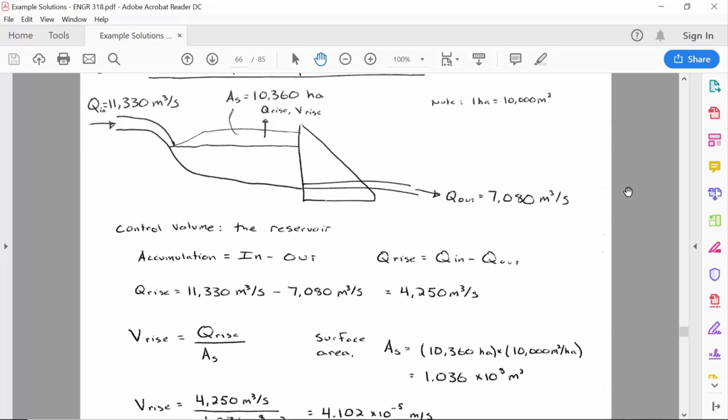So then the last step to find the velocity that the liquid level is rising, we have to take Q rise divided by the area. This is V equals Q divided by A, so this is just application of the continuity equation. We have it in terms of meters per second, but if we want to know the rate it's rising in meters per hour, because maybe that's a little bit easier to comprehend -- like I wouldn't know what 4.1 times 10 to the negative 5th meters per second looks like, but I can wrap my head around 0.148 meters per hour.

So that tells you, if your house is however many meters above the water surface right now, it tells you how long you've got to evacuate, if the water level's rising.

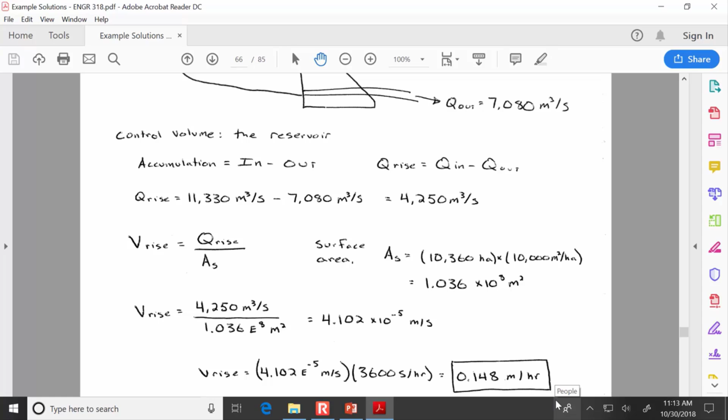I guess I've got that show Ozark on my mind. They're always talking about how people were flooded out. Anybody watch that? The whole point of the show is fluid mechanics. Some guy's deeply offended by the electric company and how they flooded his ancestors' land. So how could the main plot be about anything else? That's also the main plot of First Man, which I watched over the weekend - fluid mechanics, the air over the wings, that sort of stuff. So it all comes back to fluids. Any questions before we move on?

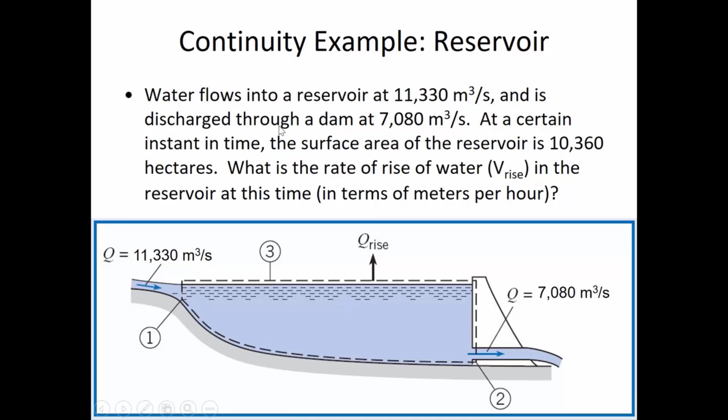Let's revisit the orifice equation, because what we looked at before was just steady state. Remember, in the lab, we ensured the liquid level stayed the same by having a certain flow coming in, water coming out from the orifice, and also an overflow. That tube we raised and lowered controlled the liquid level and made sure there was always the same amount going in as going out - it didn't flood, no spillage over the top. But it's not always the case that you have steady conditions.

One important application of unsteady flow is a storm event. When it rains, there's a sudden rush of water coming off pavement and vegetated areas, all headed towards receiving bodies like creeks, streams and rivers. That's a really important unsteady flow condition.

Sometimes to mitigate flooding of rivers, they send water to stormwater ponds. There's a good example over by Target in Barbersville - as you go towards Target, it's on the left side, behind a big chain link fence because it's so deep they don't want anybody getting in there and splashing around when it's raining.

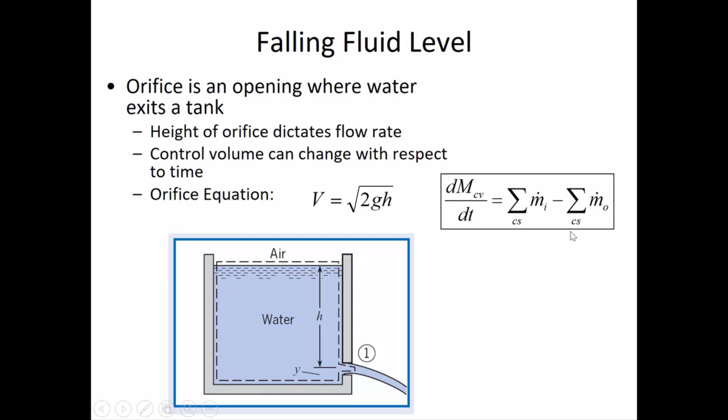So what we'll be doing is tracking the change of mass inside the control volume over time. First we look at the rate of flow out through the orifice, which is V1A1. There's a certain diameter opening - in the lab it was either 3 millimeters or 6 millimeters depending on which equipment you were using - and you can calculate the cross-sectional area from that diameter, so that's A1, the area of the opening. The velocity it comes out at we determine from square root of 2gh - that's the outflow component. Then the change of mass inside the control volume can be tracked as it decreases by looking at the cross-sectional area of the tank.

So this A sub t is a different area than the orifice area. The A sub t is talking about if we have a circular tank, what is the cross-sectional area of that? So A sub t is the top view area of the container. And then dH dt is how quickly the liquid level is falling over time.

Similar to what we just did in the previous example, but instead of the liquid level increasing, if we only have flow out, the liquid level will be decreasing.

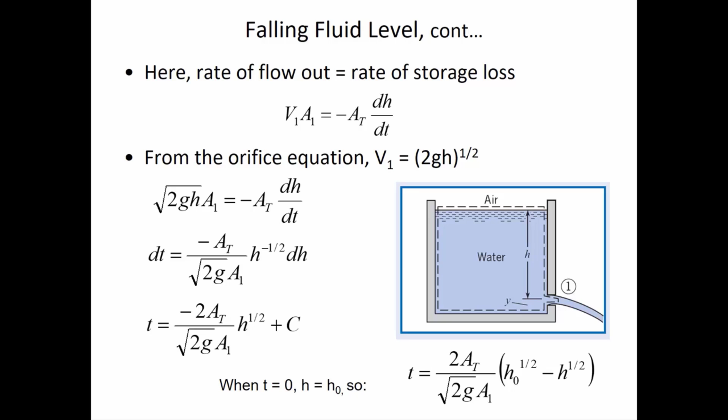On this upcoming homework, there's a problem that is almost identical to this. Do we have to derive the equation, or is it okay if we just use that one? You can use this directly. You don't need to derive it.

Okay, so let's try out this unsteady flow. The tank has a diameter of 500 millimeters, so that's going to give you the A sub t. The orifice opening is 15 centimeters, so that's going to give you the A1. The initial height of the water is 2.5 meters, and so that is from the center line of the orifice up to the water surface, 2.5 meters.

Okay, now you got to be careful because these are always trick questions. It's just like a basic intelligence test to make sure that you can dimension your drawing and put in the right values for H naught and H.

So in question A, it's asking how long will it take to fall 1.1 meters? So 1.1 is not H naught and it's not H. What you need to do is you have an initial height of 2.5 and it's going to fall 1.1. So what is the final height after it has fallen 1.1? That's what you need to put in here for H, is the final height, not the fall distance.

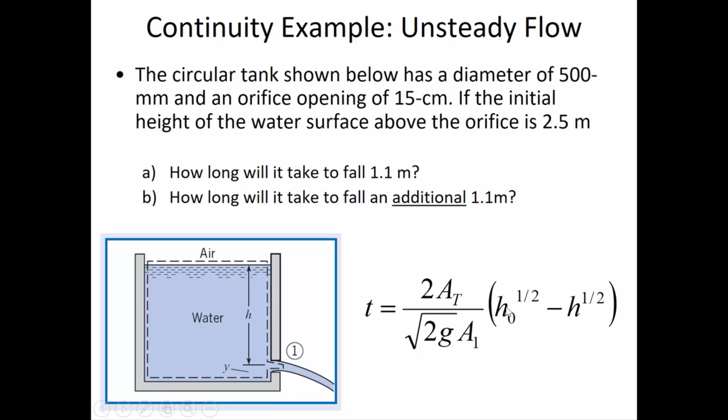All right, so I'm going to pause this for a moment so you can calculate the tank area, calculate the orifice area, and then in part A, how long for it to fall the first 1.1 meter, and then, just for kicks, let's in part B see how much does it take to fall another 1.1 meter. So you're going to have a different H naught and H than you had for the first question.

All right, so we calculate the two relevant areas, and I got a question about the wording of the orifice. It didn't necessarily say that it was a circular opening, so I changed that to make it more explicit that, yeah, it's a circular opening.

So we calculate the areas, and then the dimensioning and interpreting the heights. So that means if the initial height's 2.5 and it's falling 1.1, then the finishing height at time t should be 1.4. So we want to find out how long does it take to go from 2.5 down to 1.4.

Now, by the way, remember, this is all assuming no energy loss through the orifice. So if we wanted to actually observe this more accurately in the field, we need to apply a discharge coefficient. You've already learned about C sub D values, and so you could calibrate this orifice and find out what is the discharge coefficient, because it's not going to drain as fast as we think it is because of that whole discharge coefficient thing.

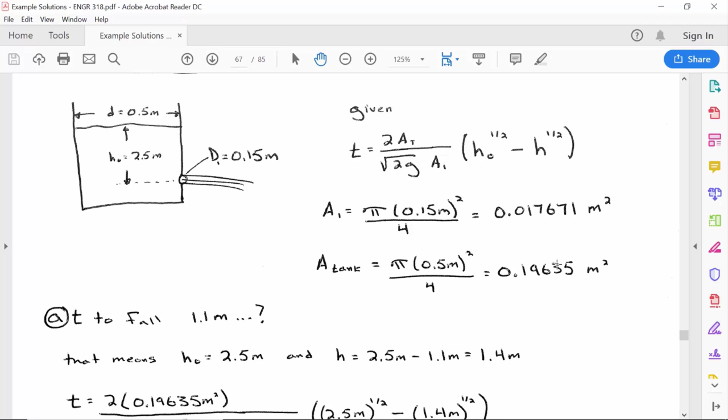But with that at the back of our mind, that this is assuming no energy losses, it would be 2 seconds. But actually, it's going to take a little bit longer than that to drain because of the discharge coefficient thing. So to fall 1.1 meters, 2 seconds.

To fall the next 1.1 meters, there's going to be less pressure pushing the water out of the tank. You've seen this, that when the liquid level gets low, the bathtub doesn't drain as fast. Or if you put a hole in a garbage can full of water, as the liquid level gets lower, the flow rate out decreases.

So that next 1.1 meters means it's going from 1.4 meters down to 0.3. The starting depth is 1.4, and the finishing depth above the center line of the orifice is 0.3 meters. So the areas stay the same, but the fall heights are different, so it's going to take longer, 3.19 seconds for that next 1.1 meters of fall.

This equation is going to go in the FE reference manual. It's not there now, but it's going to be in the next edition, which comes out in 2020. So keep your eyes peeled. I'm going to see to it that this equation's in the next FE reference manual, so we can start writing questions like this. We need to add some more unsteady flow questions. And the first step is putting it in the equation book.

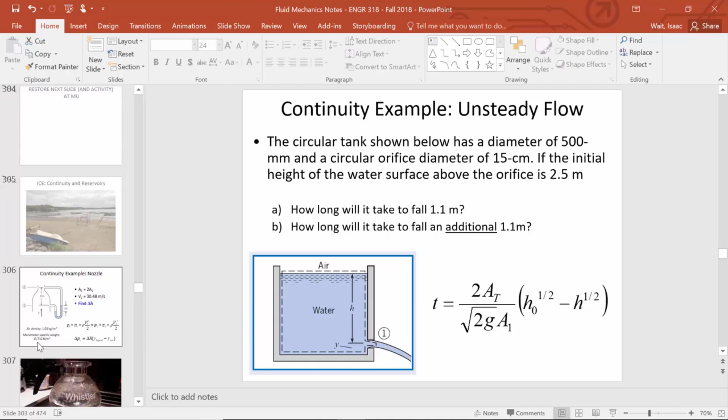All right, another application of the continuity relationship is flow through a nozzle. Here we have a combination. We've got a manometer. And remember, a manometer is a place where we can use a fluid deflection to tell us about a pressure.

The fact that we have this liquid in the manometer with a deflection tells us that there's more pressure somewhere, and at another spot there's less pressure. So just by looking at it, can you tell 1 versus 2, which of them has more pressure and which has less? Where is there more pressure, 1 or 2?

1. And what's the clue that there's more pressure at 1? Yeah, if there wasn't more pressure, it'd be the same. But there's an imbalance there. That means that there's more pressure at 1.

Now, the question is, does that match what Bernoulli's equation tells us? Bernoulli's equation says that if the velocity increases, the pressure will decrease. And that's what we see. All right, so all is right in the universe. The manometer is behaving the way we'd expect it to behave based on Bernoulli's equation.

So let's try and throw in some specifics here. If we know that the area at 1 is double the area at 2, we can use this first relationship of A1 and A2 to give us the velocities. We know the velocity at 1, that's somehow been defined or measured. So the velocity at 2 is going to be double that, because the area at 2 is half the area at 1.

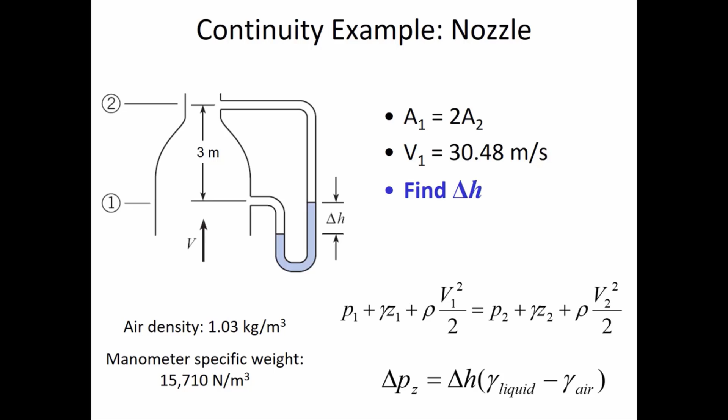Rearrange this Bernoulli's equation so that on one side you have P1 plus gamma z1 minus P2 minus gamma z2. What's on the other side when you rearrange Bernoulli's equation to look like this on the left side? Do a little algebra.

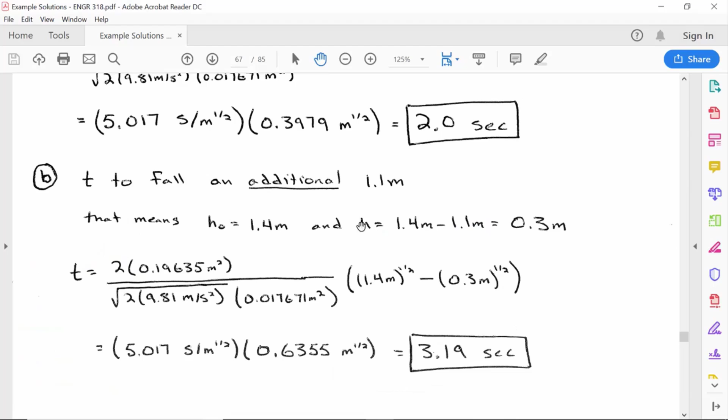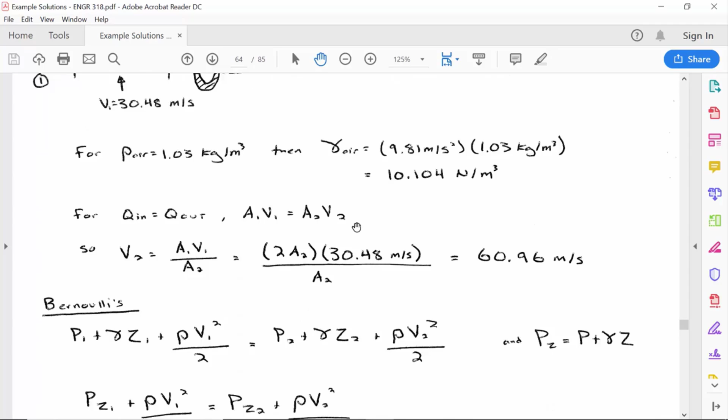I've got some of the preliminaries up on the screen if you want to check, like the unit weight of air, our velocity at location 2, and so on.

Okay, so with Bernoulli's equation, we just want to rearrange things so we can get the difference in piezometric pressure, because that's what we're going to substitute into the manometer equation to solve for delta H. We started off with the full Bernoulli's equation in terms of pressure instead of pressure head. Ordinarily I write it in terms of pressure head, because in civil engineering applications, that's often what we're solving for. But here, what we do is we group.

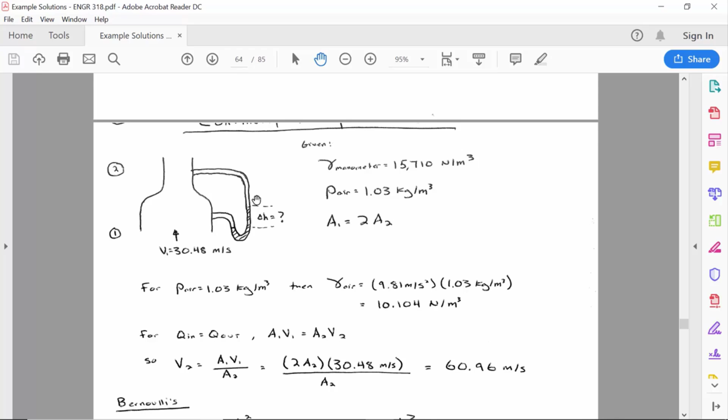But in this picture, what are the clues? Well, the clues are that you have static conditions in the manometer tube. And if you've got static conditions, then you can just use the hydrostatic equation. That's essentially what this manometer equation is -- it's the hydrostatic equation relating conditions at 1 and conditions at 2. Although this was given to you directly, you could have just started with the full hydrostatic equation and ultimately arrived at the same thing.

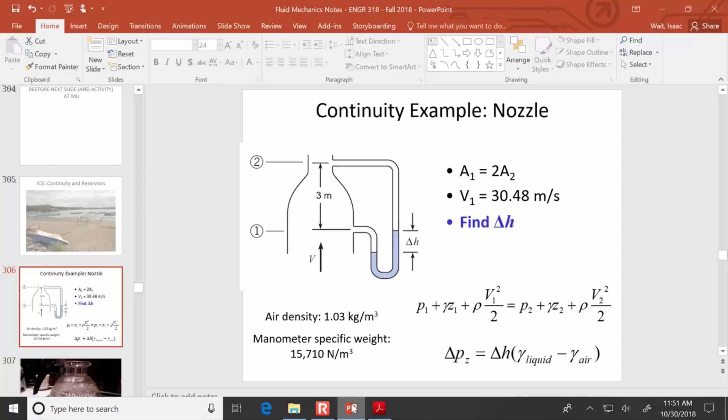Did we already see this picture before this, so far this semester? All right, so you already remember that you don't have to be told that this is boiling water, because you've already heard that in lecture before, that this is boiling water, so you remember it because I told you. You wouldn't have known otherwise.

This is boiling water. But remember, the discussion we had was that there's two ways to boil water. There's heating it up to increase the vapor pressure of the liquid until it matches the atmospheric pressure, so that's option 1 for boiling water. And boiling -- what is boiling? It's not like oxygen is forming when you heat it up. This isn't air, it's not air. It's liquid vapor.

So it's vapor H2O. You heat up this water to the point where vapor begins to form, and then it rises to the surface and goes out. So that's option 1 for vaporizing water.

Option 2, remember, was to put it in some sort of environment where the atmospheric pressure surrounding the liquid is really low. So instead of increasing the vapor pressure, we could leave the vapor pressure alone and just decrease the surrounding pressure until the two are equal, and then it'll start to vaporize.

So we saw this figure that related temperature and the vapor pressure of a liquid. We saw that water can boil at 100 degrees Celsius because its vapor pressure becomes equal to atmospheric at that temperature. And by the way, that's no coincidence, of course.

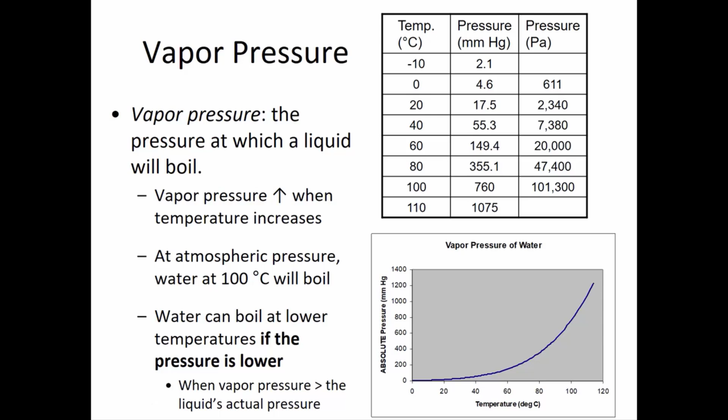And so the water kind of collides in the vapor pocket from all directions, and then it sends a small shock wave out through the water. And even though the volume is small, the increase in pressure is very high because it's filling in that void very quickly. So, is that true when it's just like a sudden change in velocity as compared to just a gradual one?

Well, it could be a gradual change. One of the places that people talk about cavitation the most is in submarines, like the propeller on the back of a submarine. The cavitation occurs when the submarine is accelerating and also when it's moving at high speeds. But it doesn't necessarily have to be at high speeds for there to be cavitation. Cavitation can form either because of a velocity change or because of a big absolute difference in velocity, like on the front side of the propeller versus the back side. There would be a pressure difference between the two.

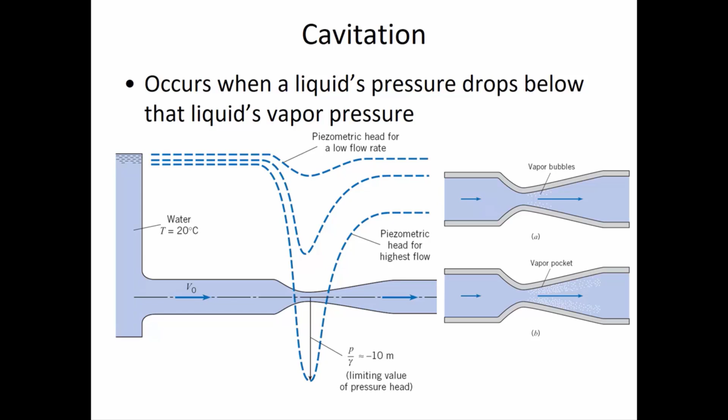So I don't know if that addresses your question, about this sudden change in velocity creating a bigger shock wave. Yeah, if this was a really gradual transition, it's possible that those vapor pockets might collapse more slowly than if it's a more sudden transition, and that would probably be less problematic from a materials scour standpoint.

What we'll see here is that the change in pressure and the shock wave it sends often occurs in pumps near impellers, because impellers are locations where the pressure of water changes very dramatically and quickly. This pump diagram shows it sucking water from an origin, and on the suction side of the pump, the pressure is low. But then suddenly the pump adds a lot of energy in the form of an increase in pressure, and that rapid change from low to high pressure can cause cavitation, depending on how long the suction side length is and the elevation difference between the reservoir's water surface and the physical location of the pump. So there are factors we can control and keep an eye on to prevent cavitation, but when it occurs, it causes quite a lot of damage to pumps.

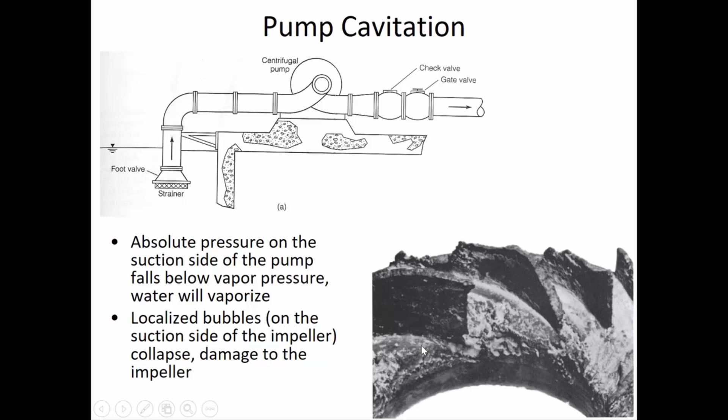So let's try and predict whether there will be cavitation. The criteria is whether the pressure of the water is above or below the vapor pressure of the liquid. If the water pressure is below the vapor pressure, then yes, there will be cavitation, because that means you're not holding the water down with the surrounding pressure, so some of those molecules can go into the vapor phase. But if the vapor pressure is less than the water pressure, then there will not be cavitation.

So here, the continuity relationship is what we can use to calculate velocities. In this case, the velocity is just given directly. So put it into the Bernoulli equation to predict what will be the pressure at location 2, and then compare that to the vapor pressure of the water. We're assuming this water is at 60 degrees Celsius.

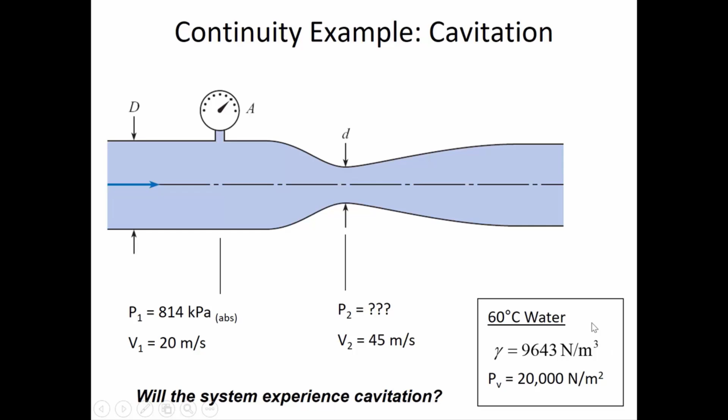Yes, there will be cavitation. Let me... All right, so the water's going from 20 to 45 meters per second. The pressure started at 814 kilopascals, which ought to be plenty, except that there's a pretty big change in pressure. And I like to group it so I can see, for example, how much pressure head we have to begin with. So there's 84.41 meters of head to begin with, and there's also some velocity head at location 1.

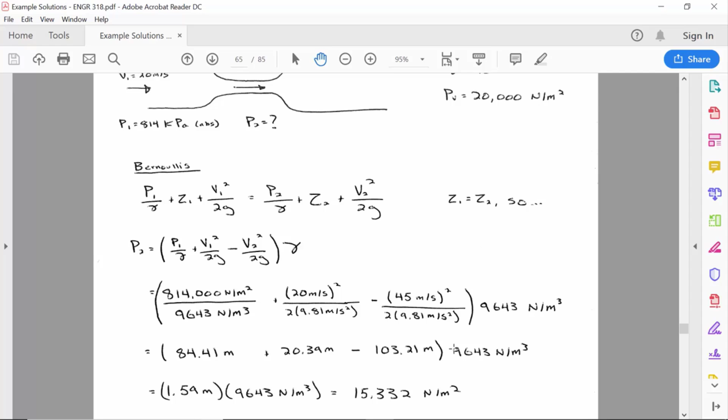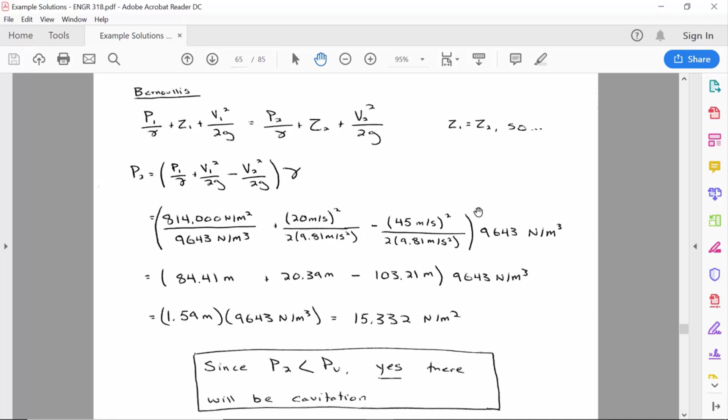But the velocity at location 2 is going to be so high that at location 2, the pressure of the water is only going to be 15,332 pascals on an absolute basis. So 15,332 is less than the vapor pressure of water of 20,000 pascals, and so therefore, yes, there will be cavitation. So it could be potentially risky. In hydraulic engineering, we'll go into more detail identifying some of the factors you can keep track of to ensure that cavitation doesn't threaten the equipment you're designing.

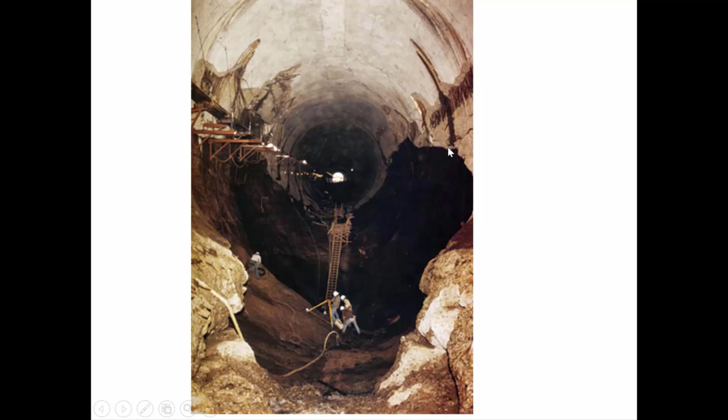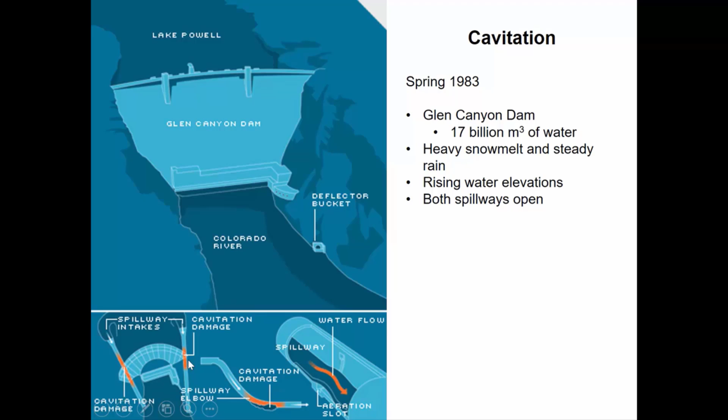One of the historical cavitation issues that illustrates its importance was the Glen Canyon Dam back in 1983. I think I already showed you these pictures, right? What happened was vapor bubbles began to form, and it caused a little crack, and that small crack got larger, and it started to scour and erode the material. Eventually, it threatened the dam, and that spillway, you can see the location of it is in close proximity to the dam, so if it starts to scour and actually gets into the dam structure, then the whole thing could fail.